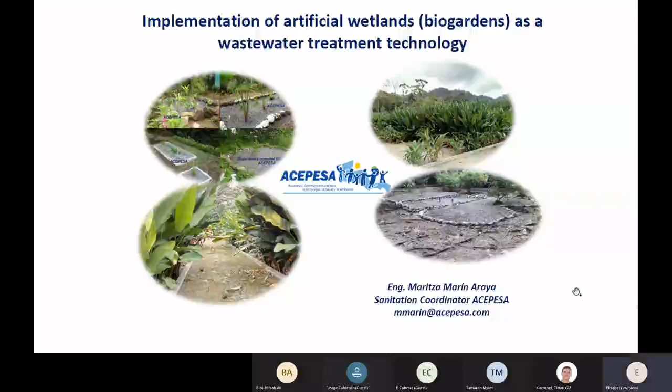What kind of communities do we want? What we propose: we want communities like this, where there's a clean river where the waters can be sent to, as you can see in this drawing, with clean waters that have been treated, where we have a community that has the ability or capability to plant.

We have a happy, clean community keeping their homes. And in the center, we can see community organization. This is something that we have lost in our countries because we have become very individualistic, and we cannot continue being like this because we need each other. We have to be in solidarity with each other. So community organization is very important, especially for working with these systems.

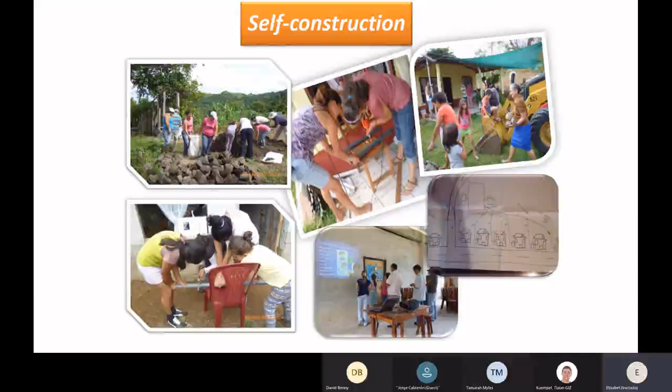We work within the theory. In the trainings we provide, we do some plans of the systems, and so people have an idea of the models. So we discuss in groups. Before starting the construction, they have an idea, because sometimes it's very abstract. So they have an idea on how to start, and they become very excited about participating in the process. Next.

This is a community in the south of Costa Rica. On the left, the before: those were the waters going through their yards, and then that's the group that worked from the excavation to the end of the system. As you can see, the biogarden needs to be filled with water to start planting. Next.

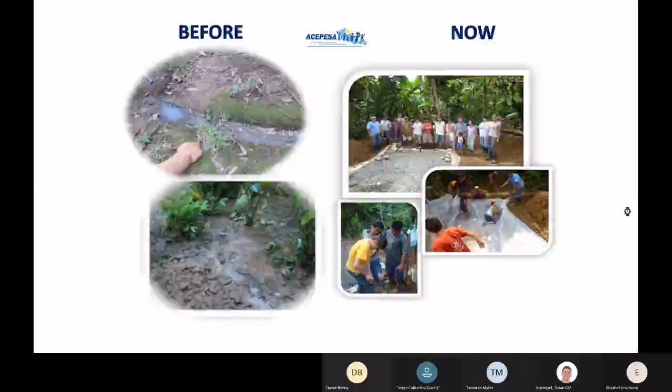And as I was saying, in the integrated system, the system elements, to work with this, what each part of the process implies in the treatment of waters. From the uptake, there are also other actions that I did not include. Leak control is something that is very important. Sometimes we don't assign the value it has. Hygiene, the condition of water in the part of treatment.

Thinking about rural aqueducts, the institutions in our country train the workers, the plumbers from these communities, about disinfection, so there is an appropriate disinfection or cleaning of water and they are applying the proper amount of chlorine that is required. These people are given tools so they know, according to the consumption and water production, the right doses. This is very important. Conduction, leakage control, water culture, measuring the consumption, very important.

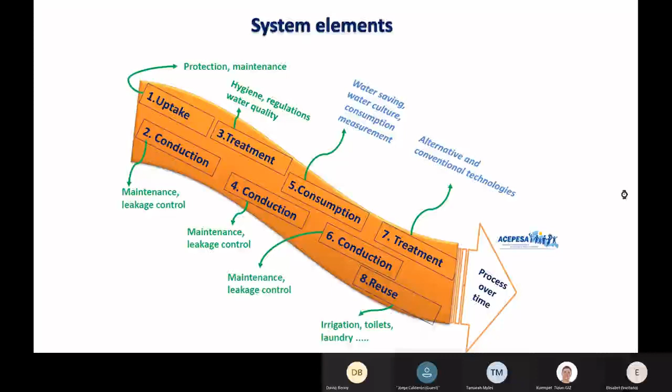The wastewater treatment with artificial wetlands. In Nicaragua, they call them biofilters. It is a system that is simple, but we cannot say that it's not delicate. This system needs a design because we need to know the consumption of water. We have to consider some variables, some parameters that are asked by regulations.

It is a system with different types of rocks and plants. Each one of those elements has a function inside the system. The microorganisms that live there, we have to provide the conditions so they can work efficiently. A level of water that won't go over the rock, so we don't have other problems or mosquito problems. And the filter bed, that is the different rocks.

It is important to take into account that the artificial wetlands are not drains, because they are treatments. In drains, waters just move. This is very important. Sometimes people say that's very easy, that's a drain, and no. And then they realize. The important thing is that they realize, but the worst thing is that if we build this as a drain, it won't be functional.

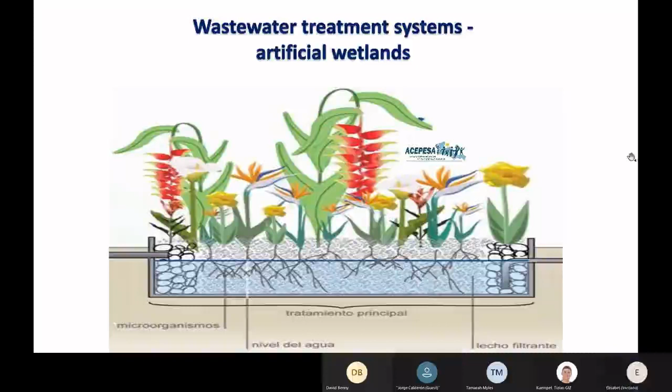As you can see here, a biogarden is an artificial wetland. It cleans water by using stones and plants. Through photosynthesis, they inject oxygen into the water to help microorganisms grow. In this case, it's a horizontal wetland, a subsurface wetland. We have a teacher with kindergarten students, and she's explaining what this biogarden is about.

These systems are our lab, and they are a lab for many specialties, from botany, biology, chemistry, and children can plant the plants here, and they know that these plants grow and that they helped the system. Next.

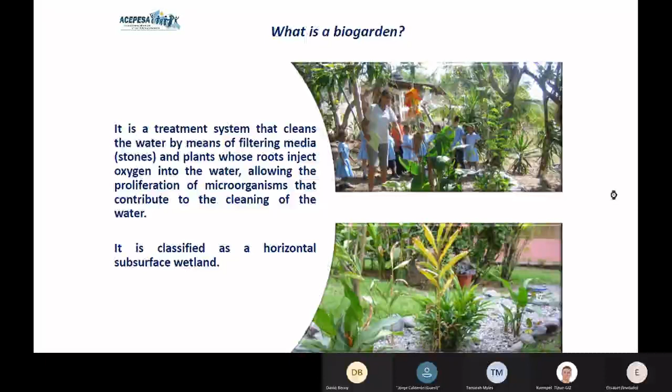The construction process. In the construction process, before level taking, we have to assess the house, their contents, their yard, the toilet. These are very important elements, because from there we can work with the family to try to change those habits and improve hygiene. Based on that analysis, trainings for the families, the go-ahead of the family, and the commitment of the family.

It doesn't mean they will do everything, but we start with the construction process, that is level taking, excavation, which goes according to the design of the system. Then we place the plastic, different types of plastic, and we place some material so the rocks won't break or tear the plastic. Then placement of rocks, of the pipes, and the small rocks, and then the pre-treatment tanks.

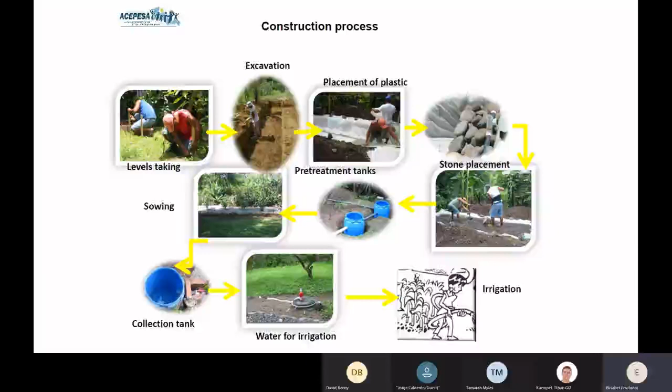I want to tell you, these were two systems built at a restaurant. It is a restaurant that works 24/7, so they estimated the amount of customers that go to that restaurant. An analysis was made of the use of water, consumption of water. And from there, we were hired for the biogardens. Primary treatment or pre-treatment, they hired that from another company. But I wanted to tell you that these are two biogardens, 15 meters wide by 24 meters long.

But the owner said, I want a bigger biogarden. And we said, yes, we can do this. Maybe he will want the restaurant to become bigger. So we have this designed 70 centimeters deep with a total volume of 252 cubic meters. The placement of the system is in series. One system goes to a biogarden and then goes to another.

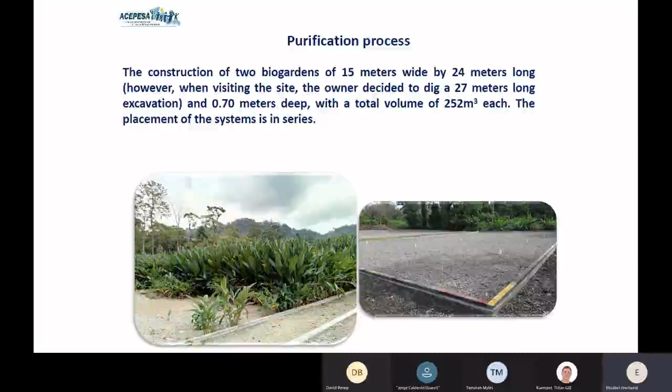What did we do here? We built an internal structure with rocks, so the water had to work in a zigzag mode. So we helped not to have blind spots. You cannot see it here, you will see it later, the ventilation pipes, but in the first biogarden, in the internal part, the water comes in and moves in a zigzag fashion. So the water gets more oxygen, and the system gets more oxygen.

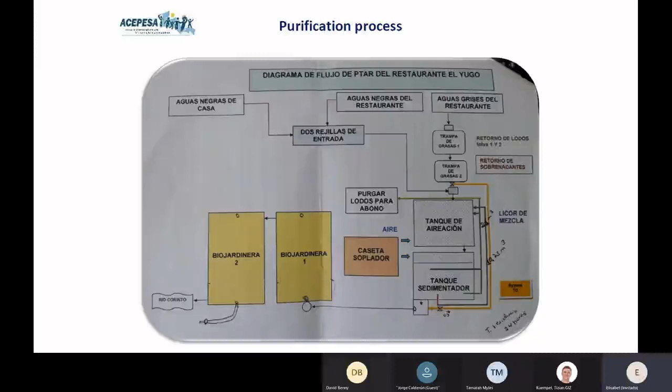We also have the tanks. We have the grease traps. They receive the gray water from the restaurant. They call it wastewater in a home. They go to the grease traps separately. This is more or less how it is. They can be different ways because it depends on the terrain, the amount of land, the characteristics of the land, and the types of waters that will come in. Next.

But in the design, we have to adapt to what you find in the field, because one thing is what we do from our desk, but when you go to the field, you can find something else. So we have to find a way to adapt to the physical conditions of the place.

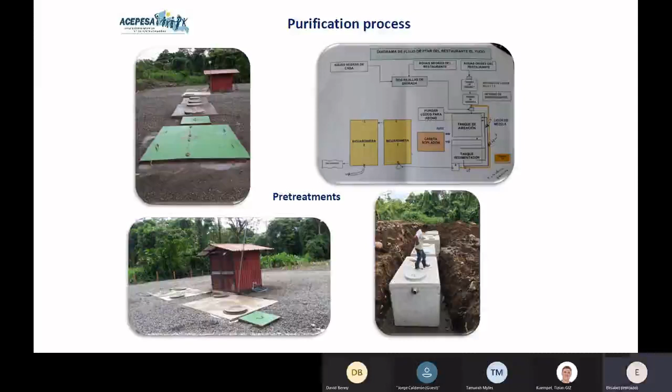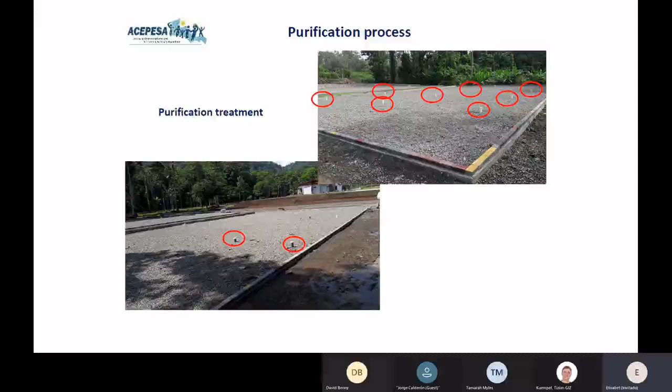As I was telling you before, those red circles are the ventilation pipes, so they could help the plants to get more oxygen in the system. This ventilation helps it to function better, to work better. And those venting lines were also placed by those small rock borders that were built so the water moves in a different way. Next. Next. Next.

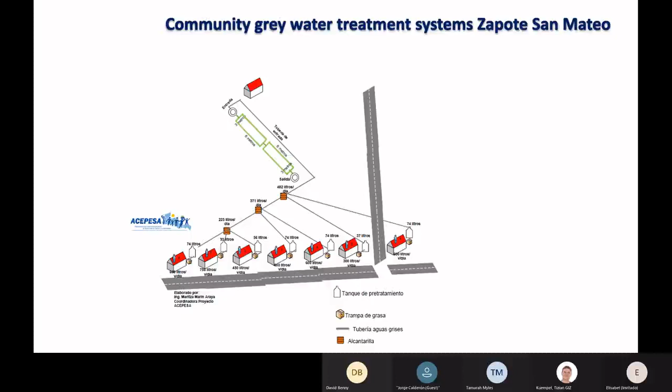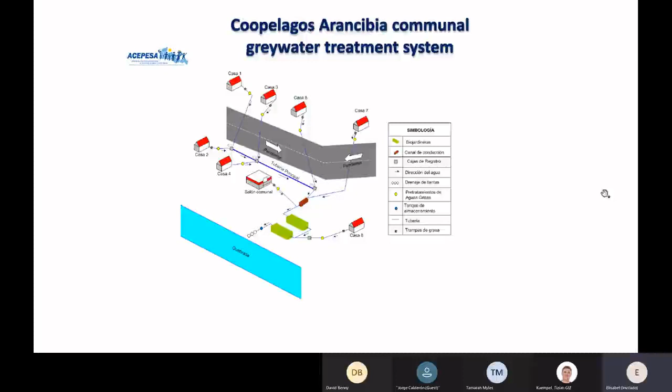And there is something important. The group from this community has started providing training to other communities with similar characteristics, especially for the construction of the system. Next. Next.

This is a community treatment of gray water with one system because there are fewer houses and the consumption habits are different. They're also using water for irrigation. In this community, they're using it for the grass they're giving to the cattle.

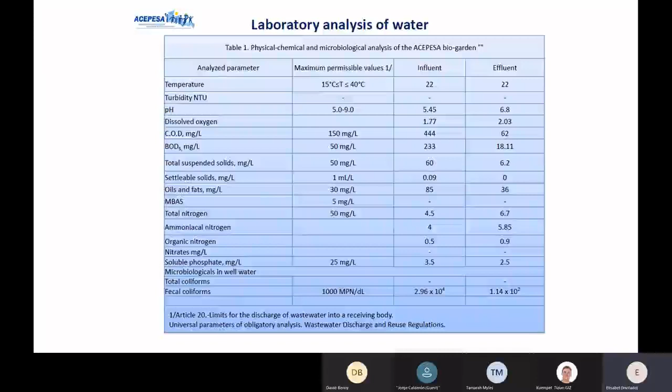The advantage is it provides a lot of room for research. Of course, we're adapting the system. It requires a lot of research, for example, the type of rocks. There's a part of Costa Rica where we have different types of rock. We have limestone. So what is its influence?

The installation cost, I cannot tell you exactly, just approximately, because it depends on where it will be constructed, and according to this is the price of the rock, and also the pipes. Operation and maintenance costs are low. They don't require electricity. They are completely

natural. According to experience, we know that every 2 or 3 years we have to check the first 2 meters of rocks, how they are, because there's some crust or some adherences to the pipes. So we have to monitor this, pruning the plants, changing some of the plants, the roots, taking care of everything.

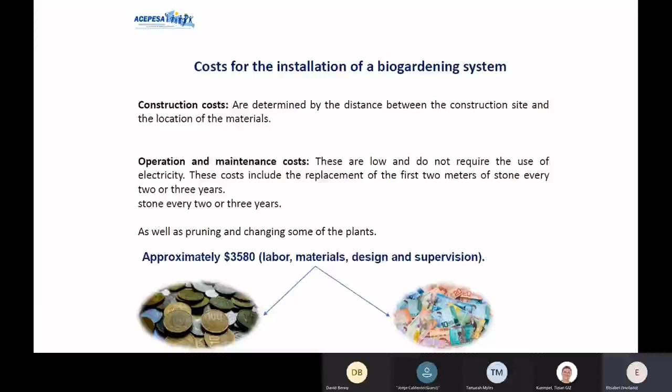It's about $3,580 or less, maybe, because if we have the work of the community, costs will be low. And it's considering design, supervision, the materials. If it's very far away from the hardware store, where you get the materials, it will be higher, of course.